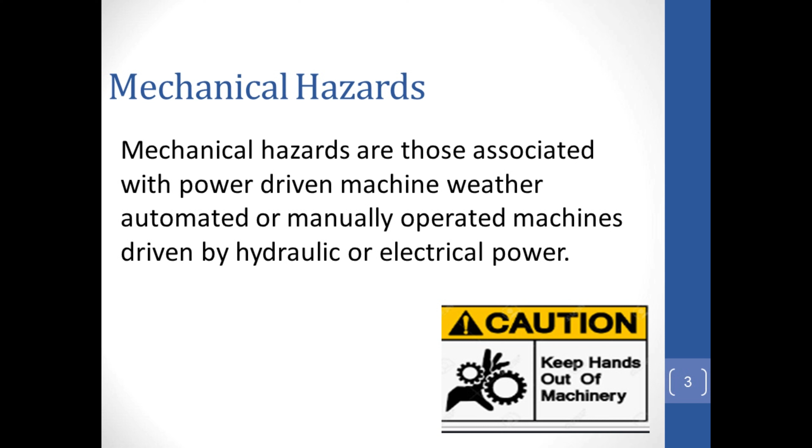Frequency of mechanical hazards: based on data collected on injuries and deaths in the workplace, injuries caused by machinery represent the second highest number.

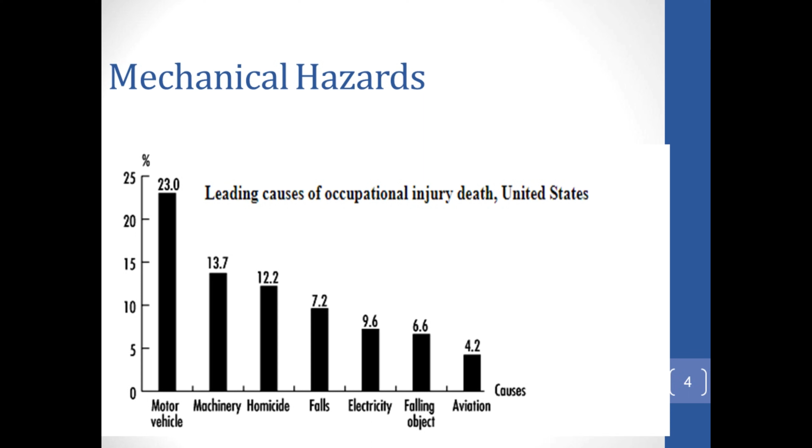Mechanical hazard statistics: improper or non-existent guarding and lockout of machines and equipment can result in disfiguring injuries, amputation, and deaths. In the Workplace Safety and Insurance Board statistical supplement to the 2010 annual report, the following was reported for 2009: 2,171 lost time injury claims for being caught in and compressed by equipment; 427 lost time injuries for being rubbed or abraded by friction, pressure, or jarred by vibration; and 361 amputations, that is, injuries resulting in loss of body parts.

Repeating the mechanical hazard statistics: improper or non-existent guarding and lockout of machines and equipment can result in disfiguring injuries, amputation, and deaths. For 2009, 2,171 lost time injury claims were reported for being caught in and compressed by equipment, 427 lost time injuries for being rubbed or abraded by friction, pressure, or jarred by vibration, and 361 amputations resulting in loss of body parts.

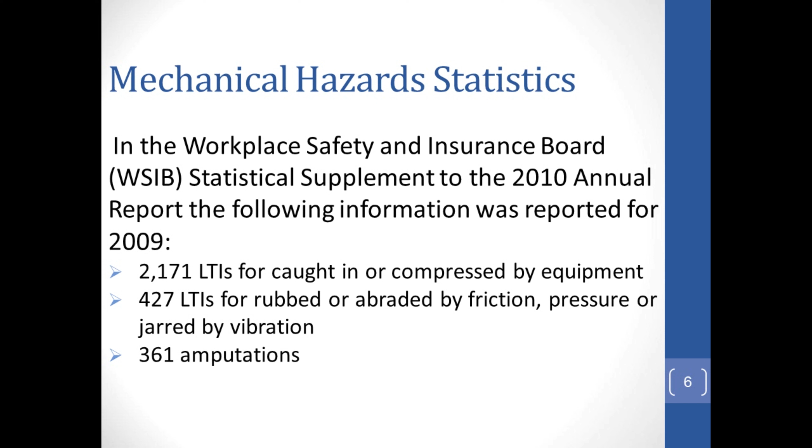Mechanical injuries: in the industrial setting, people interact with machines designed to drill, cut, shear, punch, clip, staple, stitch, abrade, shape, stamp, etc. If workers fail to follow safety precautions, these actions meant for the workpiece can instead happen to humans.

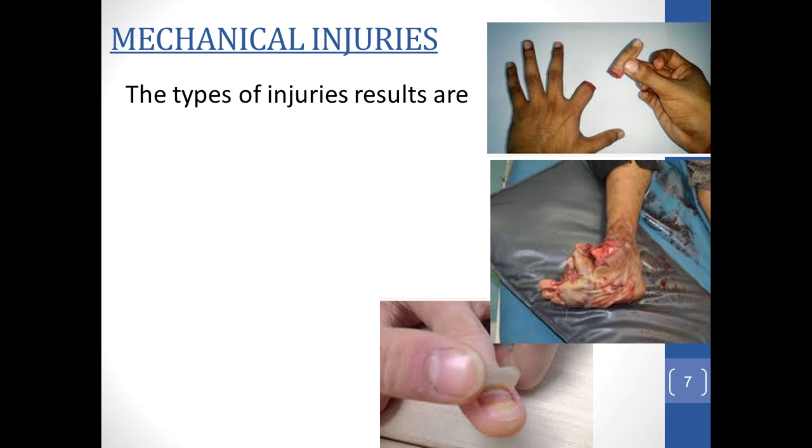One type of injury is straining. A strain results when muscles are overstretched or torn, and it can cause swelling and intense pain.

Cutting: a cut occurs when a body part comes in contact with a sharp edge. The seriousness of cutting or tearing depends on the damage done to the skin, veins, arteries, muscles, and even bones.

Shearing: this injury occurs when a mechanical force acts on an area of skin in a direction parallel to the body's surface. Its intensity depends on the pressure exerted.

Crushing: crushing injuries occur when a part of the body is caught between hard surfaces that progressively move together, crushing anything between them. Body parts can also be crushed by a heavy object falling on a foot, or by a hammer hitting a finger, etc.

Breaking or fracturing: machines used to deform engineering material in various ways can also fracture or break bones.

Puncturing: this results when an object penetrates straight into the body and pulls out straight, creating a wound in the shape of the penetrating object.

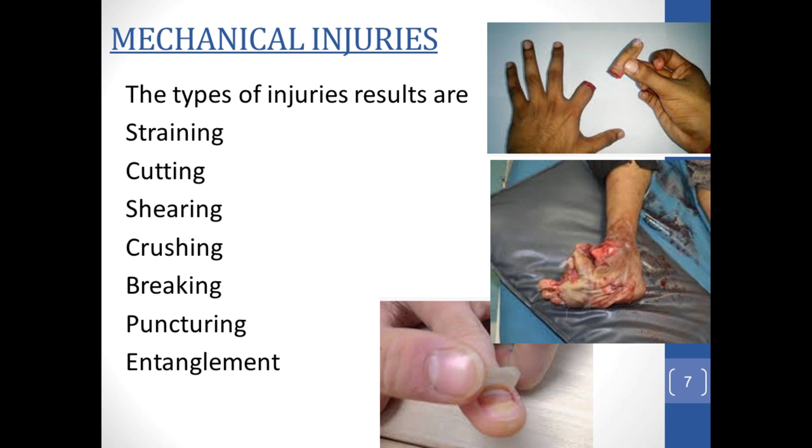Potential spots for mechanical hazards: when reviewing machinery and equipment for possible mechanical hazards, consider machines and equipment with moving parts that can be reached by people.

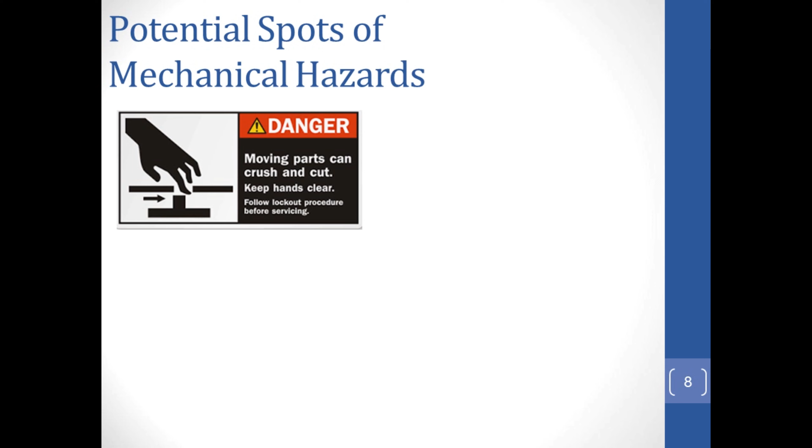Also consider machines and equipment that can eject objects, parts, components, products, and waste items that may strike a person with sufficient force to cause harm.

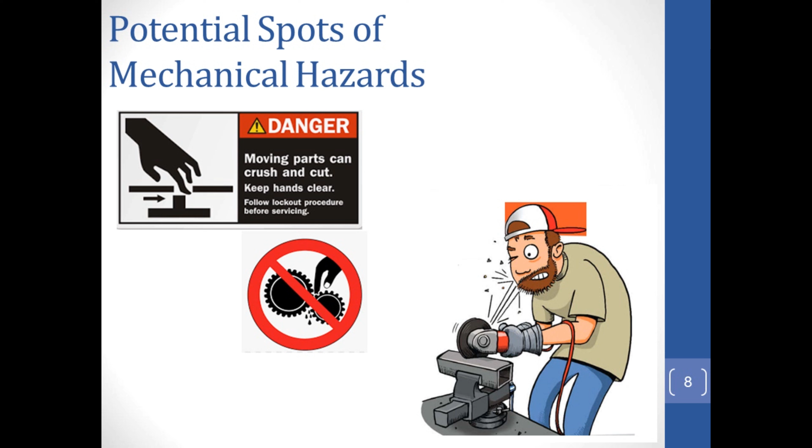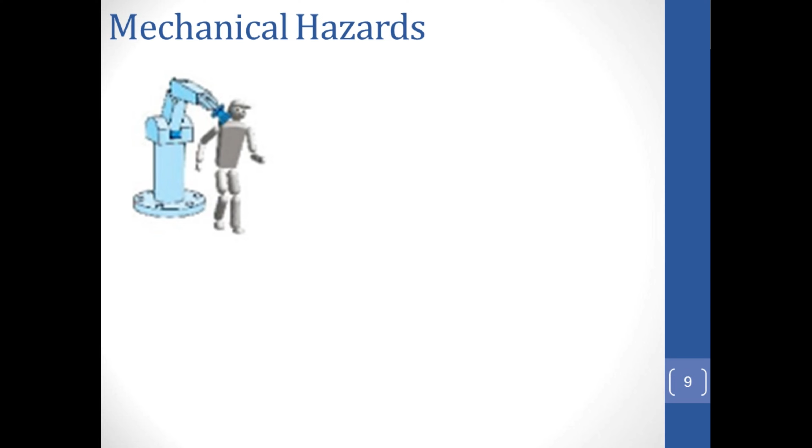Machines or equipment with moving parts that can reach people, such as booms and mechanical arms. Also mobile machinery and equipment such as forklifts, pallet jacks, and earth-moving equipment operated in areas where people may gain access.

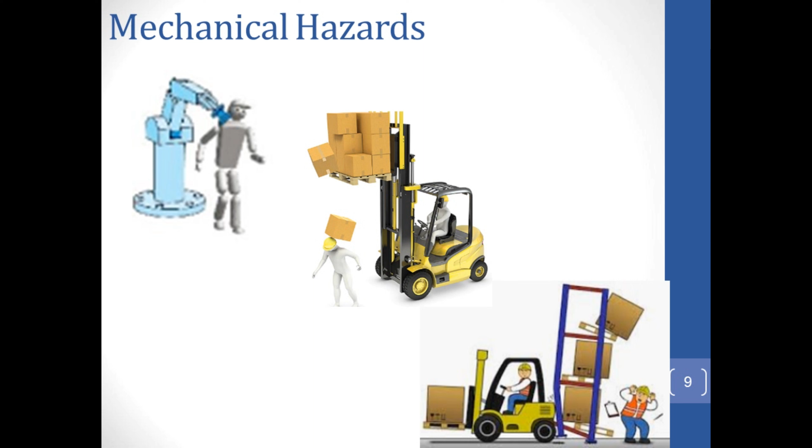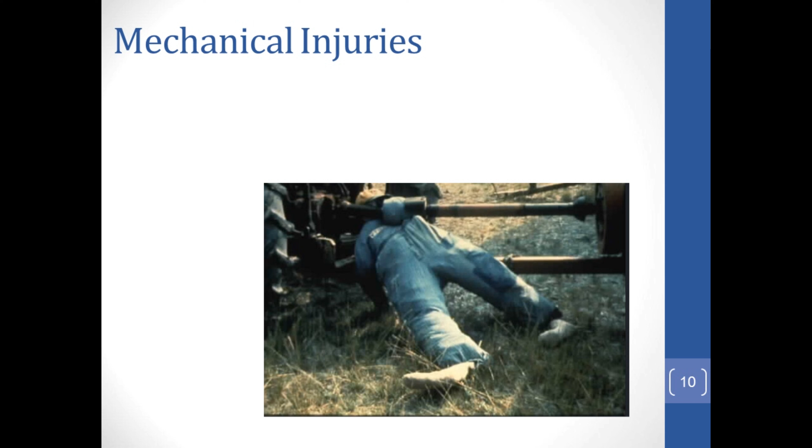Now let us discuss some mechanical injuries so you become better aware of these mechanical hazards and take better care of yourself in future. A worker was oiling a conveyor belt while it was running. The shaft, located a little out of the way, rotated so slowly you could barely see it move.

The worker didn't notice his pant leg becoming entangled with the shaft, which was heavily coated with paint. By the time he felt the fabric of his coveralls tightening around his ankle, it was too late. He was working alone, and all he could do was hold on as his leg was torn off below the ankle.

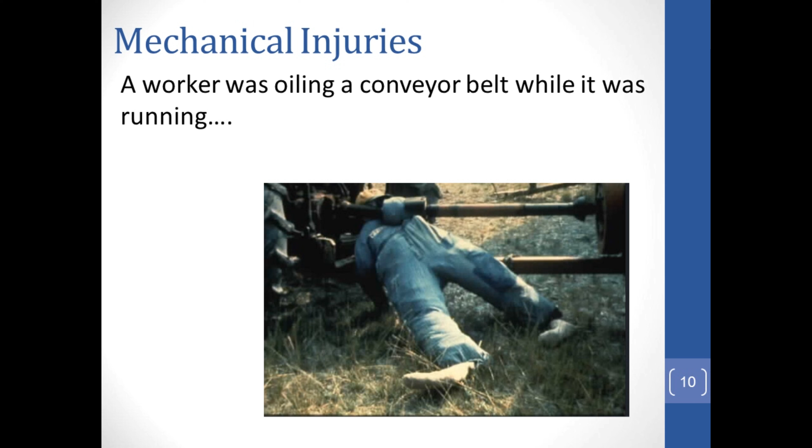Another mechanical injury involves the entrapment of a worker in a box. A production worker was pinned by a control arm and pulled into a box packaging machine, where he suffocated, despite different attempts made by his co-worker to rescue him. This 31-year-old man was married and had 2 children.

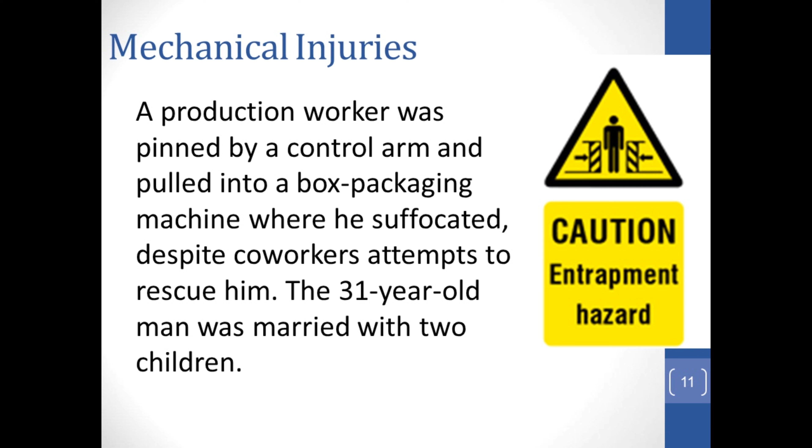An experienced worker became entangled in an unguarded roller machine and was crushed to death in a matter of moments. She left behind a husband and 2 small children.

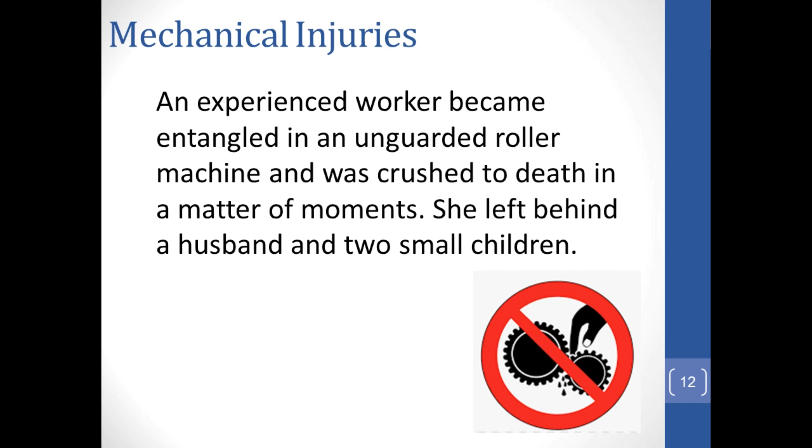Risk assessment on machine operation should be structured, systematic, and answer 4 specific questions.

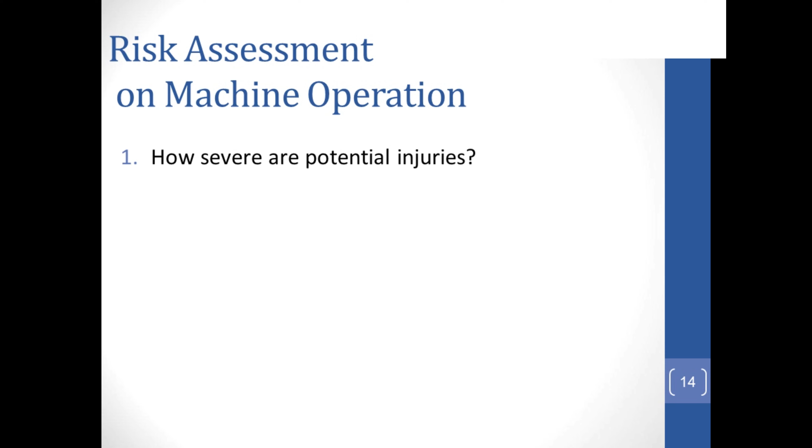These questions include: how severe are the potential injuries? How frequently are the employees exposed to potential hazards? What is the possibility of avoiding the hazard if it does occur? What is the likelihood of injury, including the case where the safety controls fail?

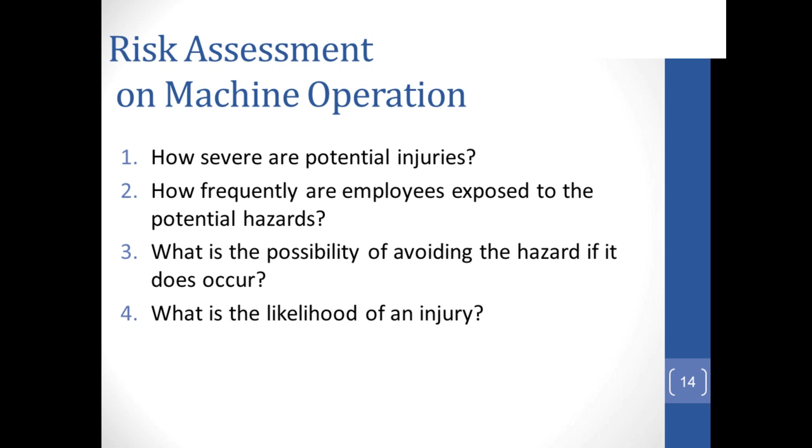Hierarchy to minimize mechanical hazard. Hierarchy to minimize any hazards involves eliminating the hazard and then preventing human beings from that hazard. Finally, we control the effects of any hazard. Same goes with the minimization of mechanical hazard.

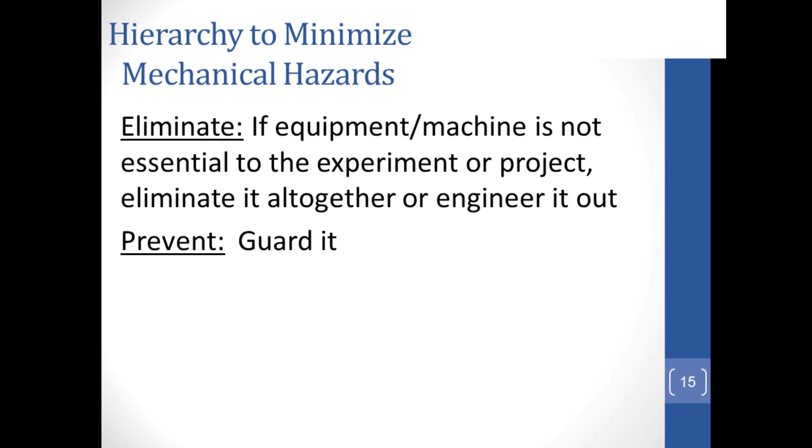First, we try to eliminate the mechanical hazard. That is, if the machine or equipment is not essential to the experiment or project, eliminate it altogether or engineer it out. Prevent: if it is not possible to eliminate the hazardous machine, then guard it. Control: also, if it is not possible to install guards, then the last option to rely on is training of personnel and personal protective equipment.

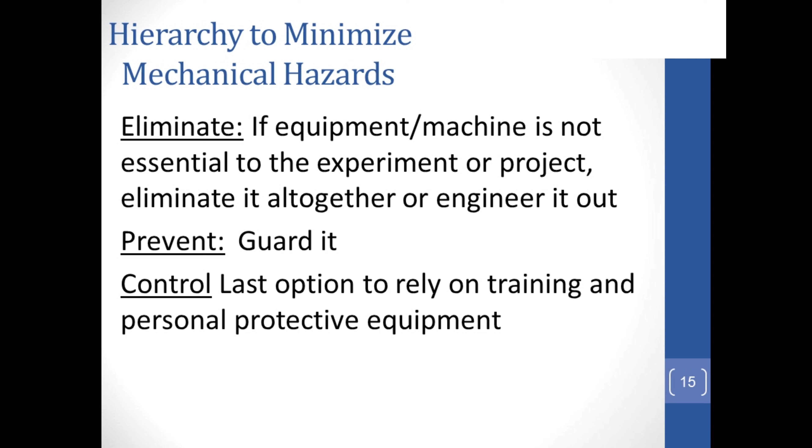Machine guards. A guard is a barrier that prevents entry of any part of the body into the hazardous area. The National Safety Council defines safeguarding as: machine safeguarding is to minimize the risk of accident of machine operator contact.

Types of guards. Safeguards can be broadly categorized as fixed guards, interlock guards, and adjustable guards.

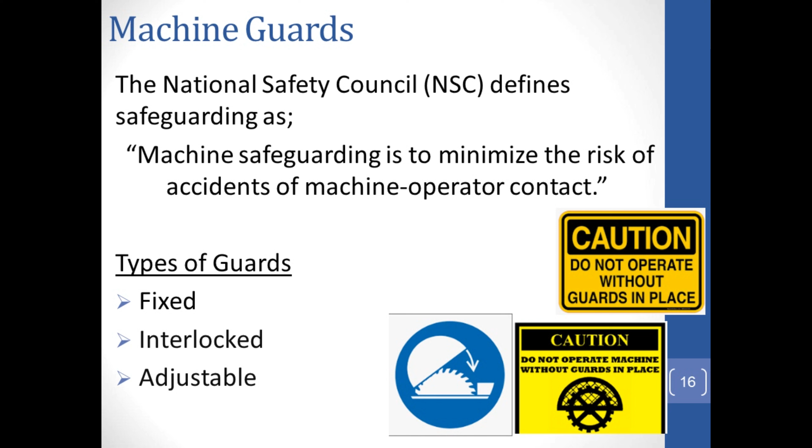Fixed guards. As the name implies, a fixed guard is a permanent part of the machine. It is not dependent upon the moving parts to function. It may be constructed of sheet metal, screen, wire, bars, plastic or any other material substantial enough to withstand whatever impact it may receive and endure its prolonged use. Fixed guard is usually preferable to all other types because of its relative simplicity.

Advantages of the fixed guard: it can be constructed to suit many specific applications. Also, in-plant construction is often possible. It provides maximum protection, usually requires minimum maintenance, and is also suitable for high production and repetitive operations.

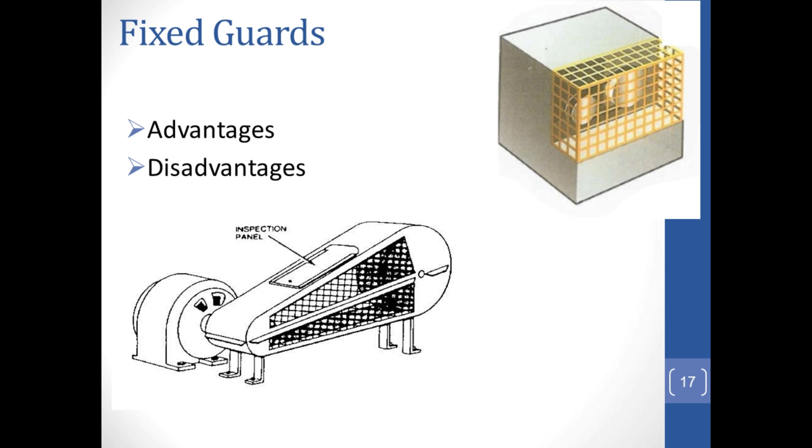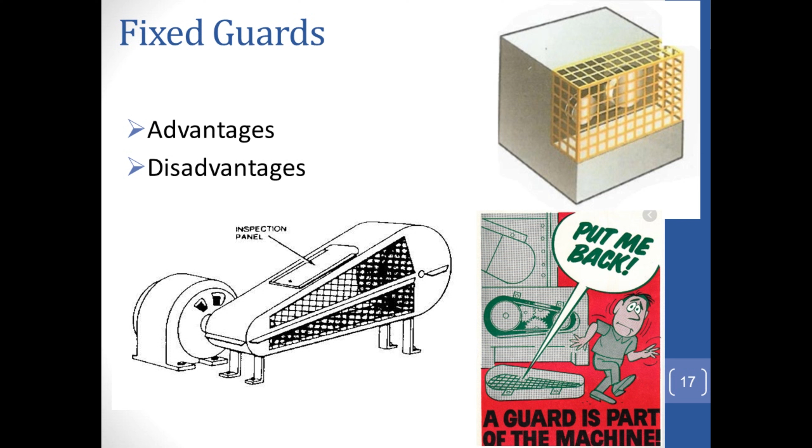Disadvantages of the fixed guards: they may interfere with visibility and can be limited to the specific operations or machines for which they are constructed. Machine adjustment and repairs often require its removal, thereby necessitating other means of protection for maintenance personnel.

Interlock guards. When this type of guard is opened or removed, the tripping mechanism and the power automatically shut off. The moving parts of the machinery are stopped and the machine cannot be started until the guard is back in place. An interlock guard may use electrical, mechanical, hydraulic or pneumatic power, or any combination of these. Placing the guard back shall not automatically start the machine.

Advantages of interlock guards: these guards allow safe access to the machine for removing jams or to conduct routine maintenance without taking off guards. Disadvantages of interlock guards: these guards require careful adjustment and maintenance, and in some cases they can be easily disengaged.

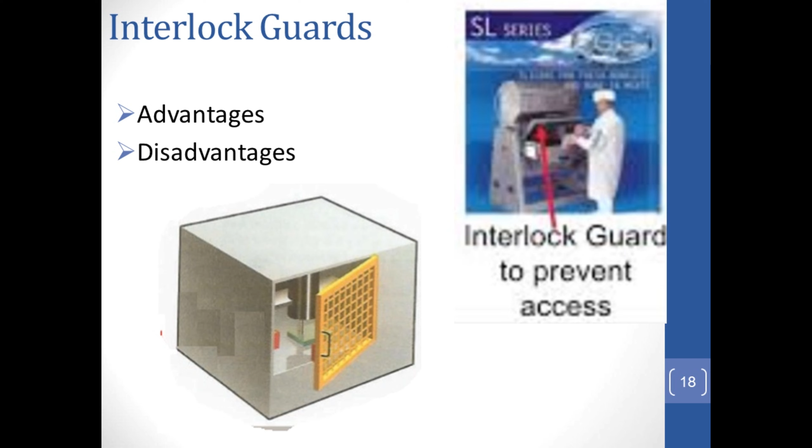Adjustable guards are useful because they allow flexibility in accommodating various sizes of feedstock. Advantages: they provide a barrier against a variety of hazards associated with different operations, and can be adjusted to admit varying sizes of feedstock. Limitations or disadvantages: hands may enter the danger area.

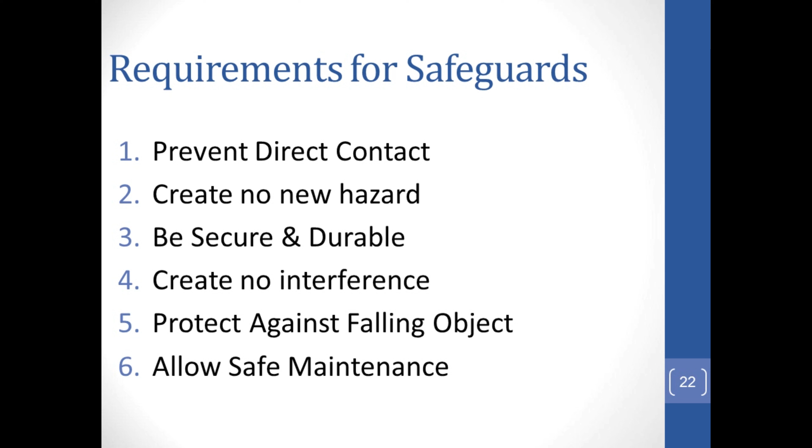Lubricating oil reservoir outside the guards with a line leading to the lubrication point will reduce the need for the operator or the maintenance worker to enter the hazardous area.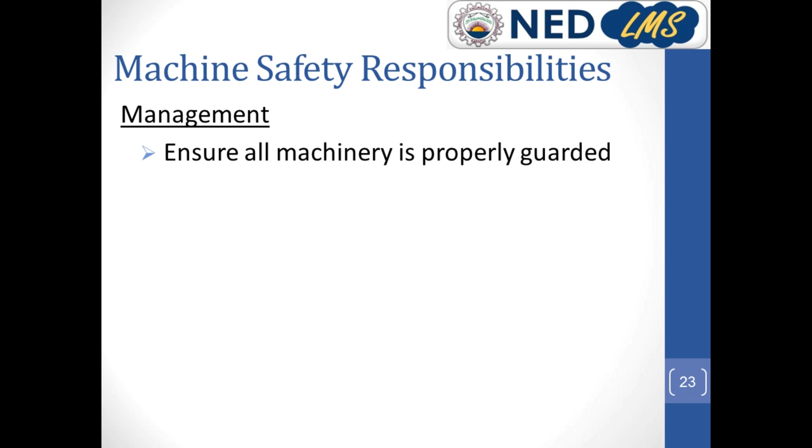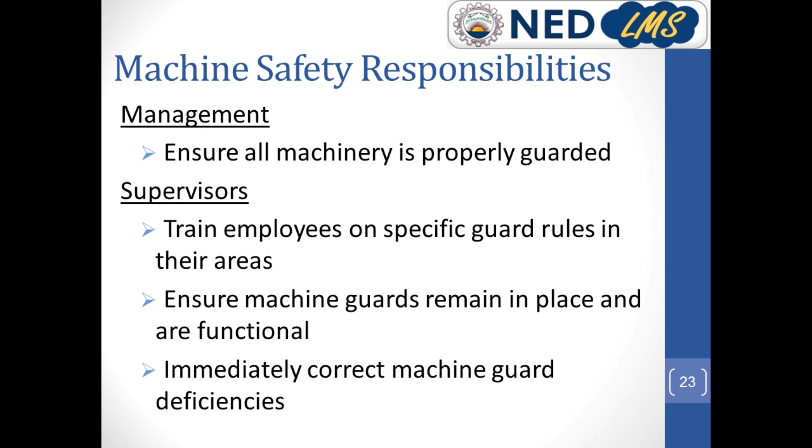Machine safety responsibilities, that is, responsibilities of management, supervisors, and operators to ensure proper use of safeguards. Management should ensure all machineries are properly guarded. Supervisors should train employees on specific guard rules in their areas and ensure machine guards remain in place and functional, immediately correcting any deficiency. Employees must not remove guards unless the machine is locked and tagged, must report machine guard problems to supervisors immediately, and must not operate equipment unless the guard is in place.

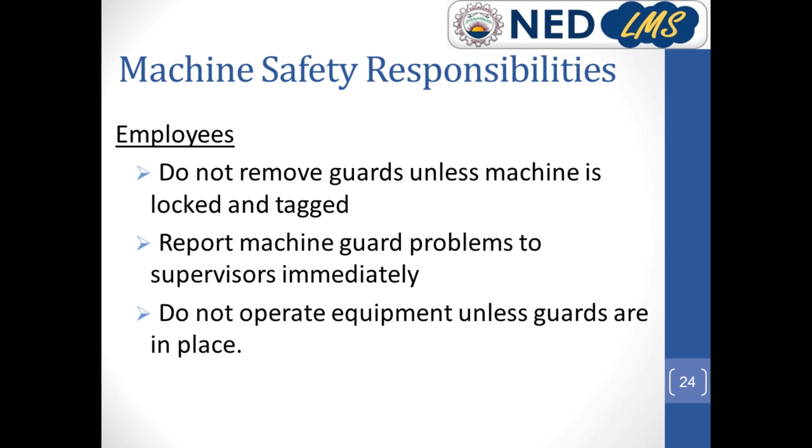Machine safety devices. A safety device is a machine control which prevents or interrupts operation if part of an operator's body, such as a hand, is within a hazardous area. These safety devices require the withdrawal of the worker's hand prior to machine operation. Examples of such devices include automatic doors in markets and elevators.

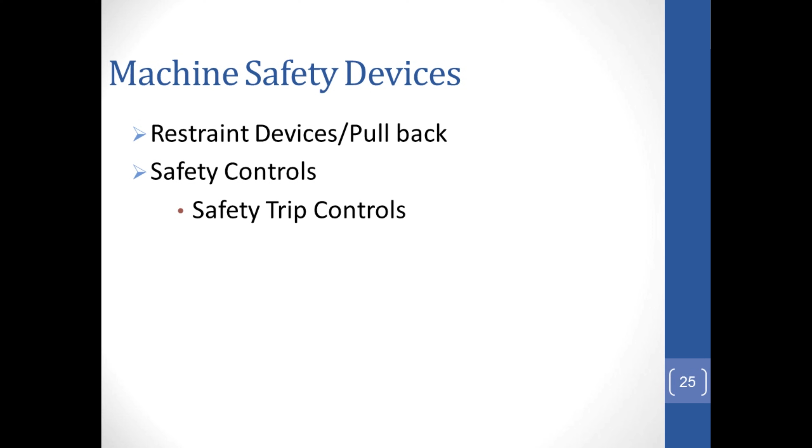Different types of safety devices present in the market involve restraint devices and pullback devices, safety controls, safety trip controls, and two-hand controls, presence sensing devices, photoelectrical presence sensing devices, radio frequency sensing devices, and electromechanical devices.

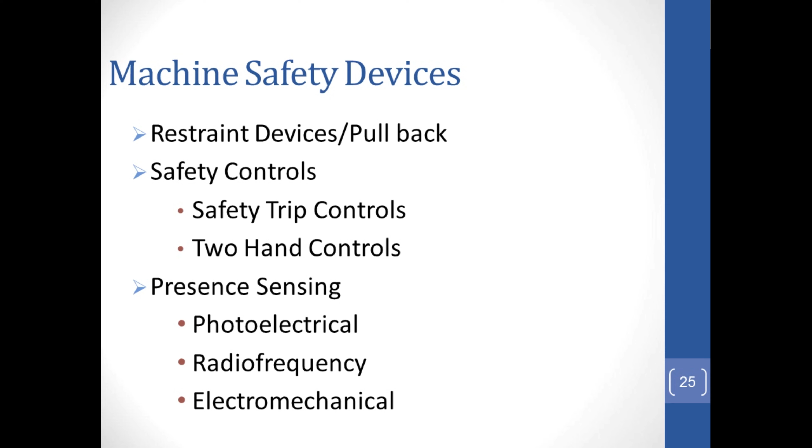Pullback devices utilize a series of cables attached to the operator's hand, wrist, or arm. They pull the operator's hands out of the danger zone when the machine starts to cycle. They limit the operator's movement, must be adjusted for each individual operator, and require close supervision. These devices are usually used on machines with stroking actions.

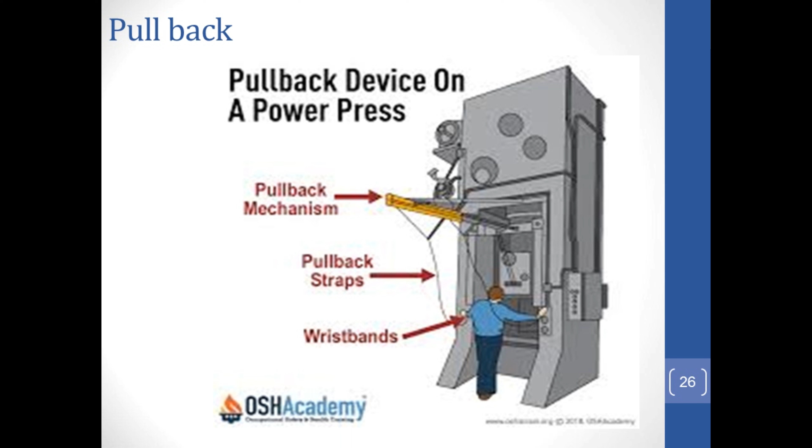Restraint devices, or holdback devices, utilize cables or straps attached to the operator's hand at a fixed point, which prevents the operator from reaching into the danger area. They involve little risk of mechanical failure. Adjustments must be made for the specific operations and for each individual. They require frequent inspection and regular maintenance. They limit movement of the operator and may obstruct the workspace.

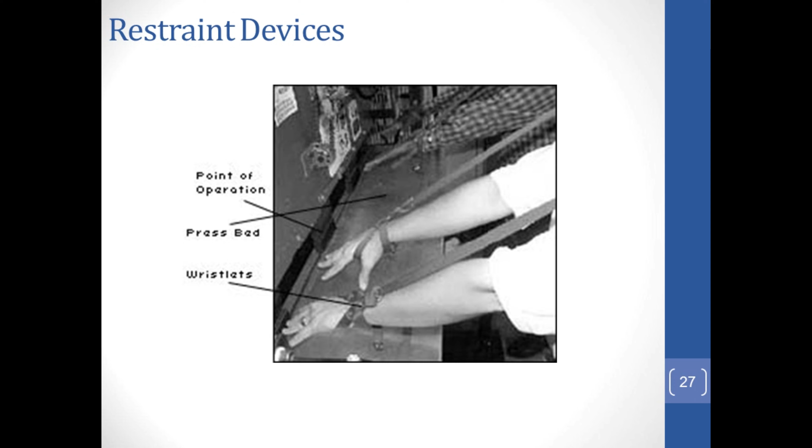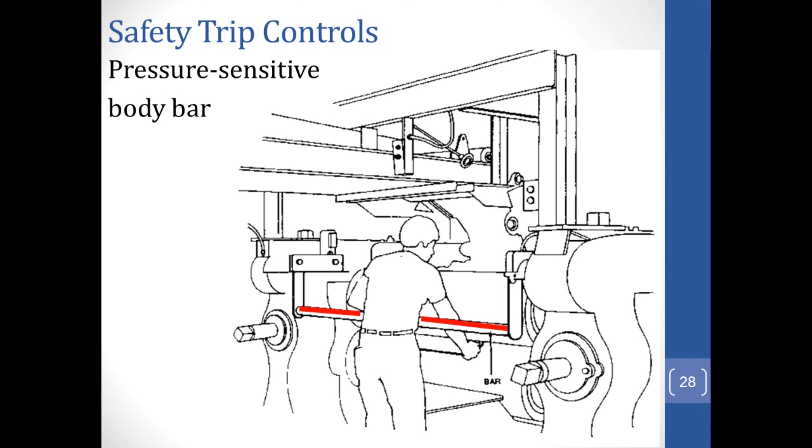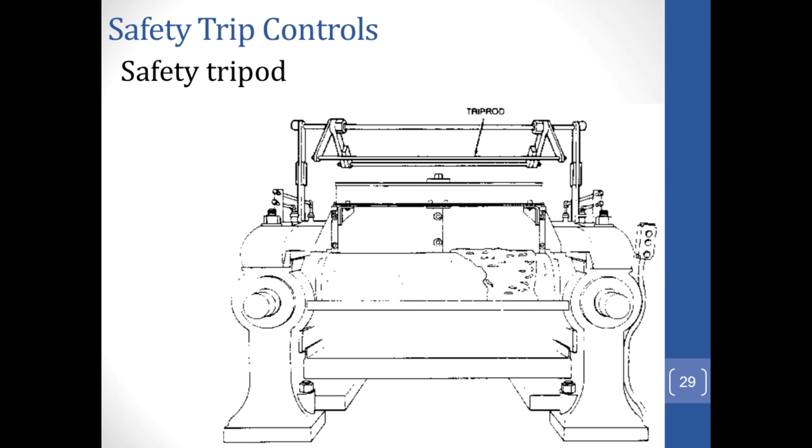Two-hand control. The two-hand control requires constant simultaneous pressure by both hands of the operator to activate the machine. With this type of device, the operator's hands are required to be at a safe location, that is, on control buttons, and at a safe distance from the danger area while the machine completes its closing cycle.

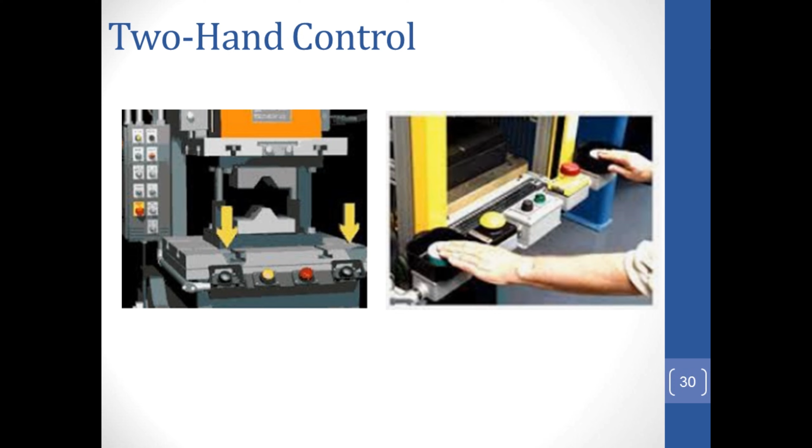Presence sensing devices. Photoelectric or optical presence sensing devices: in these devices, if the light field is broken, the machine stops and will not cycle.

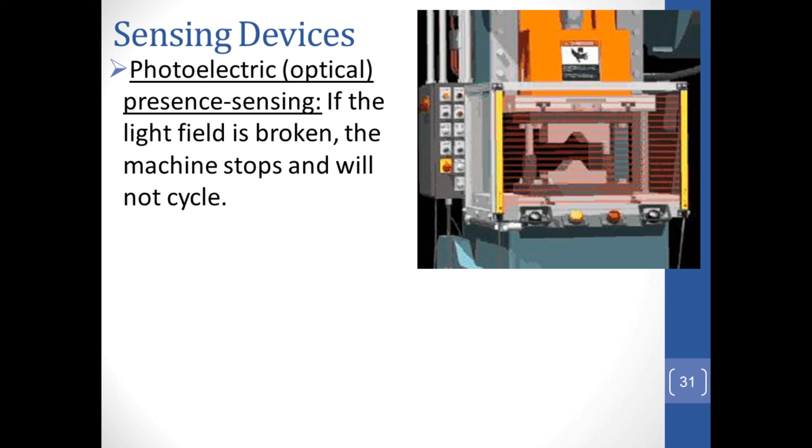The radio frequency or capacitance sensing devices use a radio beam that is part of the machine's control loop. The design and placement of the guards depends upon the time it takes to stop the mechanism and the speed at which the employee's hand can reach across the distance from the guard to the danger zone.

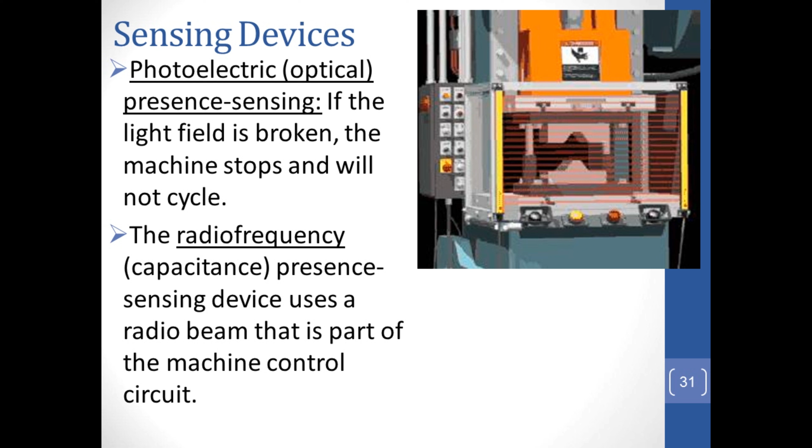Sensing devices advantages: they can allow freer movement for the operators, they are simple to use, they can be used by multiple operators, and they provide passerby protection. There is no adjustment required for different workers.

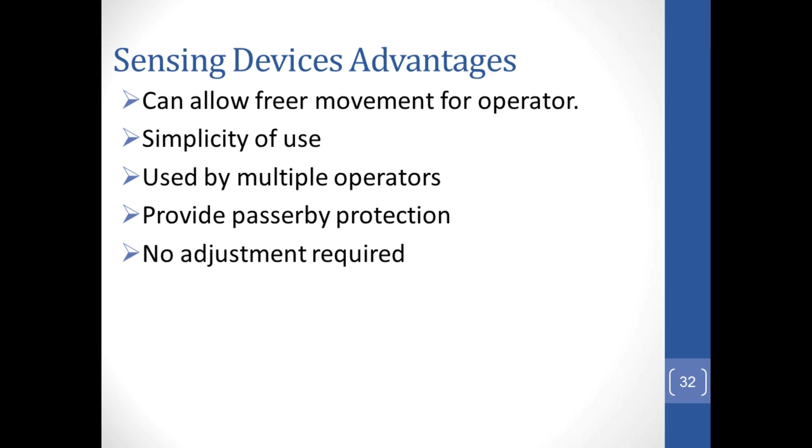Sensing device limitations: they do not protect against mechanical failure, and they are limited to machines that can be stopped.

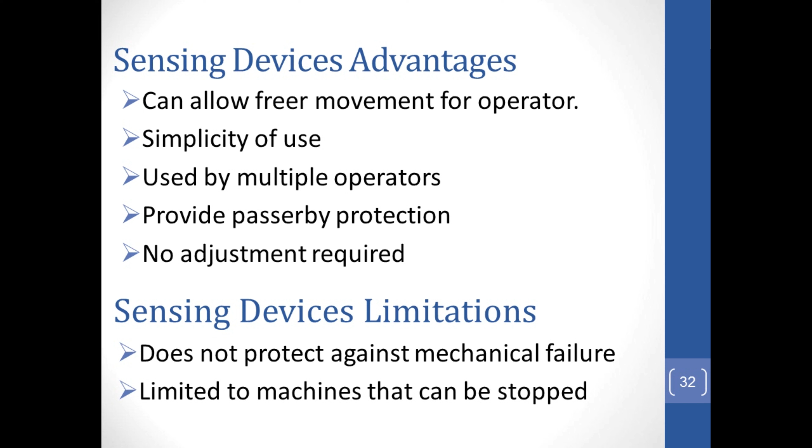Automatic feeding and ejection systems can be used as part of machine safeguards. Automatic feeding systems reduce the exposure of the operator during the work process and sometimes do not require any effort by the operator after the machine is set up and running. The system feeds the stock to the machine from rolls.

Advantages: it eliminates the need for operator involvement in the danger area. Disadvantages: some feeding methods may even create new hazards. For instance, a robot may eliminate the need for an operator to be near the machine, but it may create a new hazard itself through the movement of its arm.

Using these feeding and ejection methods does not eliminate the need for guards and devices. Guards and devices must be used wherever they are necessary. Automatic feeding systems require frequent maintenance.

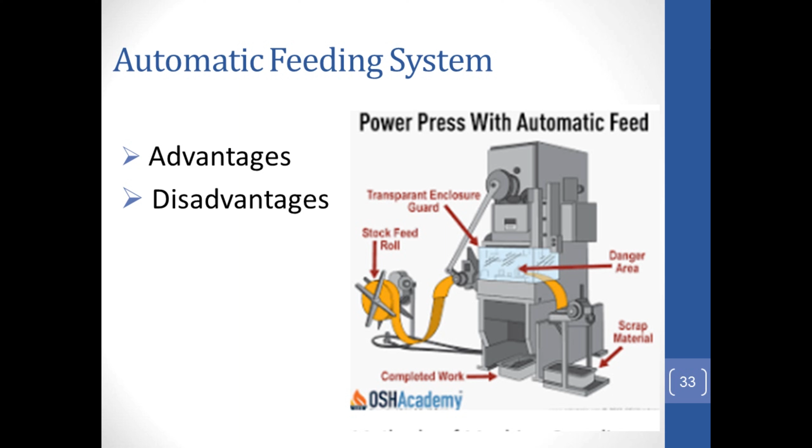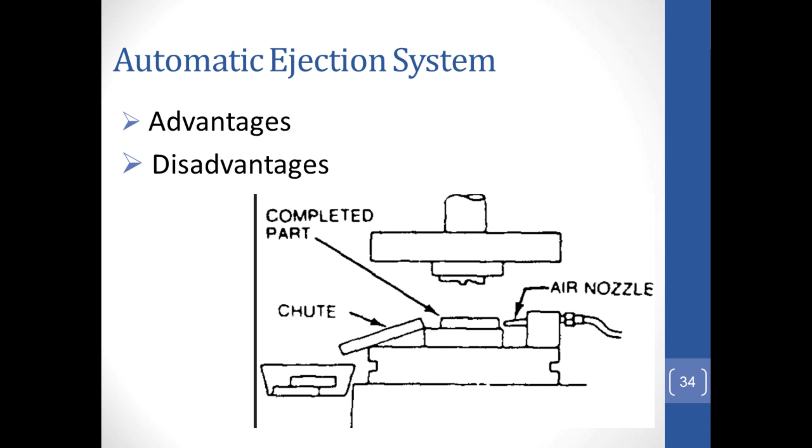Lockout and tagout devices are mostly used during maintenance or repair activities of the machine. This system refers to the specific practices and procedures to safeguard employees from the unexpected

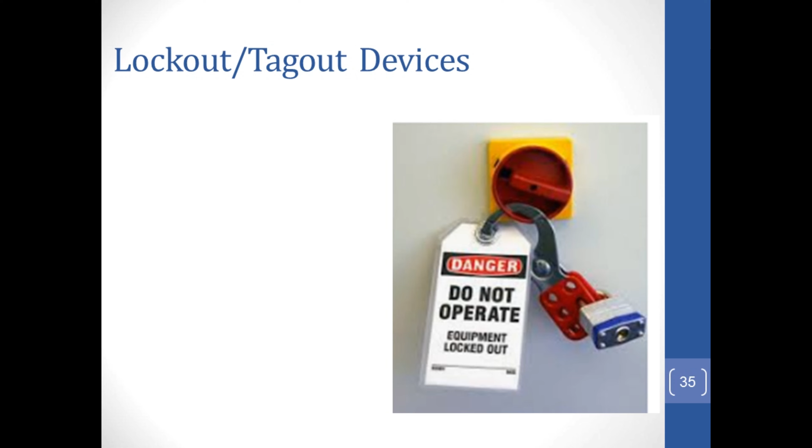energization or startup of machinery and equipment, or release of hazardous energy during service or maintenance activities. That's why they are often referred to as control of hazardous energy. Lockout and tagout violations are frequently cited by OSHA during on-site inspections.

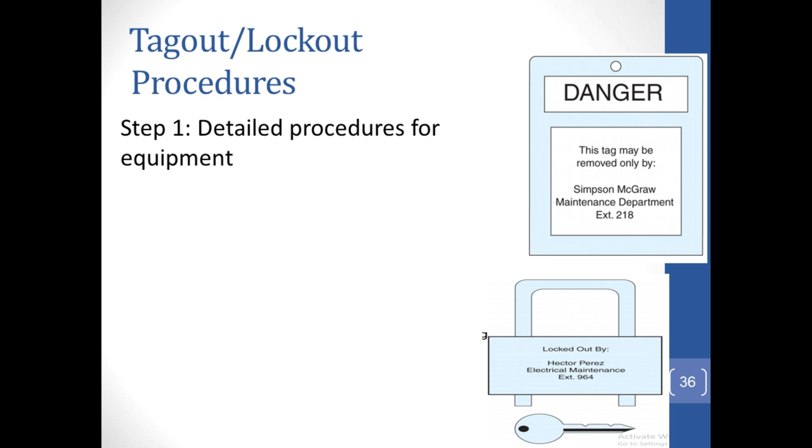Tagout or lockout procedures. An effective lockout or tagout program should include the following steps. Step number 1: detailed procedures for the equipment. Begin by making sure that you have identified the equipment correctly and accurately, including its location.

Next, determine the correct procedure for shutting down and restarting the equipment. Detail that procedure step by step in writing. Consider all the energy sources connected to the equipment.

Next step, notify the affected employees. When the maintenance is going to be performed, all employees who may be affected should be notified. Let them know the timing of the work and how long the equipment would be unavailable.

Step number 3: shut down the equipment properly. Explain the shutdown process in detail. It is not enough to say something like disconnect the machine.

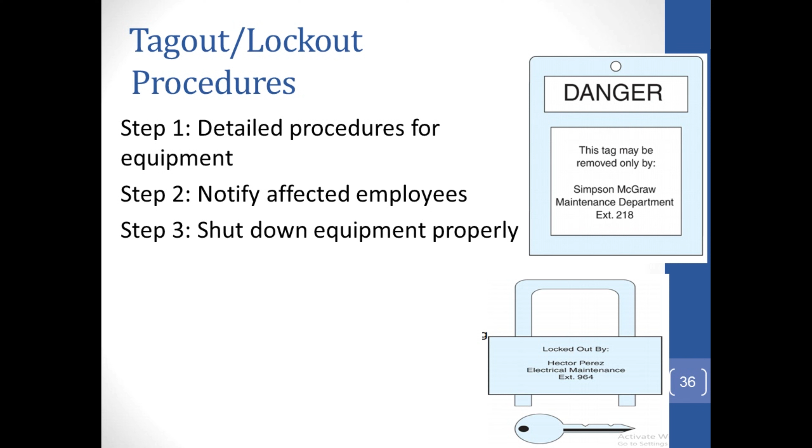Spell out the exact action to be taken and in correct sequence for performing those actions, like switch off inlet valve 1, then switch off the outlet valve, that is valve 2.

Then in step 4, disconnect all the energy sources, whether they include electricity, steam, water, gas, compressed air, or others. Also identify the process that will release any remaining pressure or other energies, even like tension in a spring assembly.

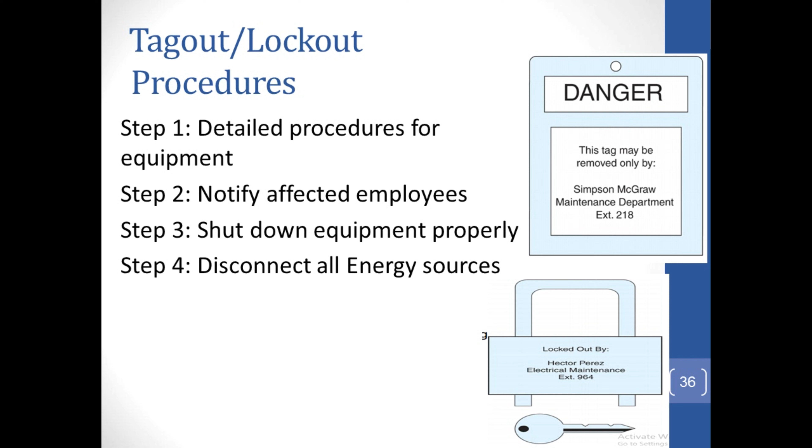Now step number 5, verify the lockout. Once you have disconnected all the energy sources, attempt to start the equipment to verify that lockout has been successful. Before you try to start it, verify that nobody is in a position where they could be hurt. Once you have verified the lockout, attach the lockout and tagout devices to the equipment to ensure that it cannot be started without removing the devices.

Step number 6: keep it in force during shift changes. The equipment must remain in lockout or tagout condition across shift changes, so workers arriving at the site are aware that the equipment is out of service. Maybe the worker at Piper Alpha ignored this step, which resulted in an accident.

Step number 7: bring the equipment back online. When the work is done and all the tools and other materials have been removed, the machine can be brought back into operation. Here again, the procedure should be spelled out with exact steps involved, along with correct sequence. For example, you may need to open a particular machine's discharge valve before you open its inlet, so any unexpected steam or water remaining in the line has a place to go out.

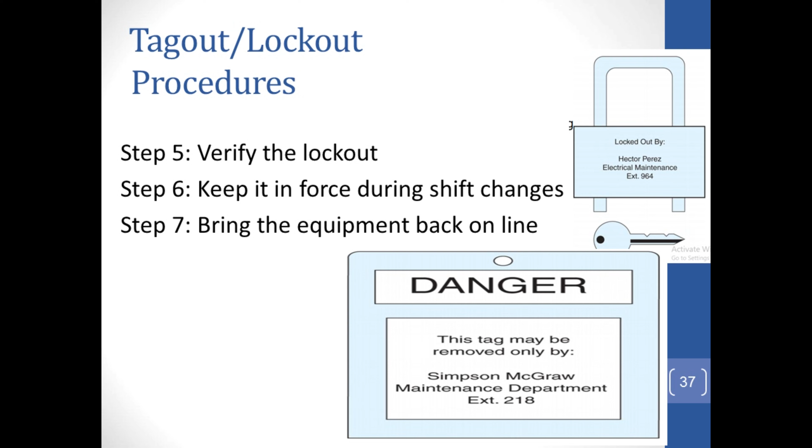Now there is a small animated clip prepared by OSHA for the training of workers about tagout and lockout devices. Let's look at that.

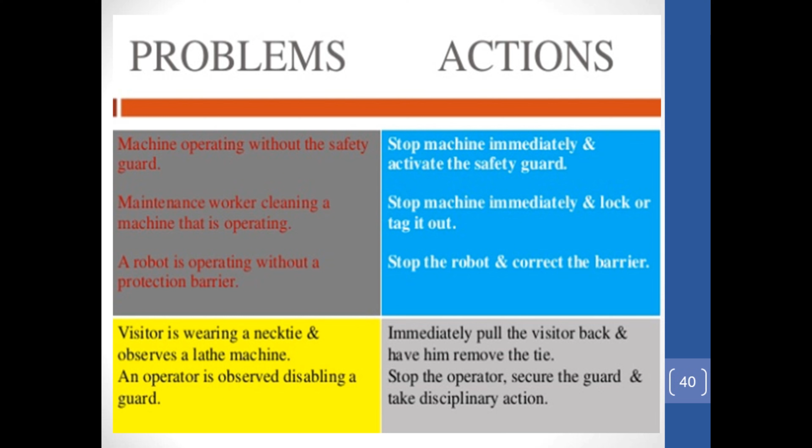The video ahead contains a small quiz to check what you have retained about mechanical hazards.

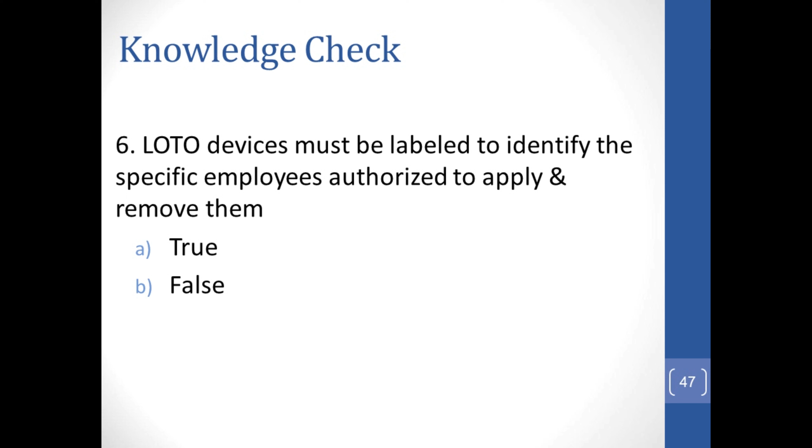Now check your answers.